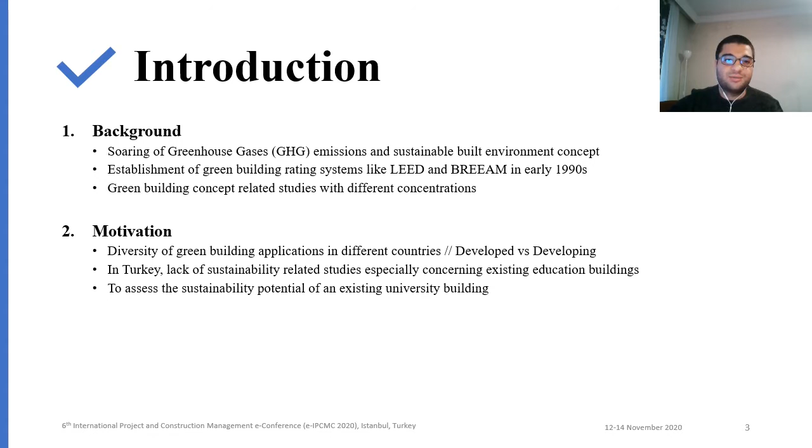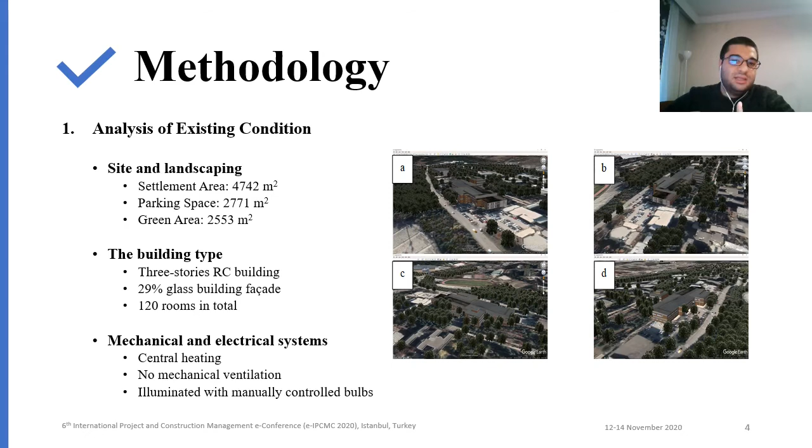In terms of mechanical and electrical systems, the building is centrally heated and doesn't have a mechanical ventilation system. And the indoor illumination is achieved with manually controlled bulbs.

Secondly, aiming to assess the sustainability potential of the existing building and to develop an understanding of whether LEED retrofitting is cost efficient or not, data is collected through, first, on-site observation and walkthroughs. Second, interviews with administrative staff. Third, document analysis. And fourth, market price analysis.

Since the building is relatively old, the exact quantitative data was missing at some points. Therefore, a couple of realistic assumptions are made in the given 5 categories: general, location and transportation, water efficiency, energy and atmosphere, and indoor environmental quality. The further details of these assumptions can be found in the manuscript. But let me give some examples on this.

It's assumed that the vehicle owners don't use alternative transportation modes. Moreover, the occupants' daily building usage durations are assumed to vary according to their social roles. What I mean is that the daily building usage durations change if an occupant is a student or an employee.

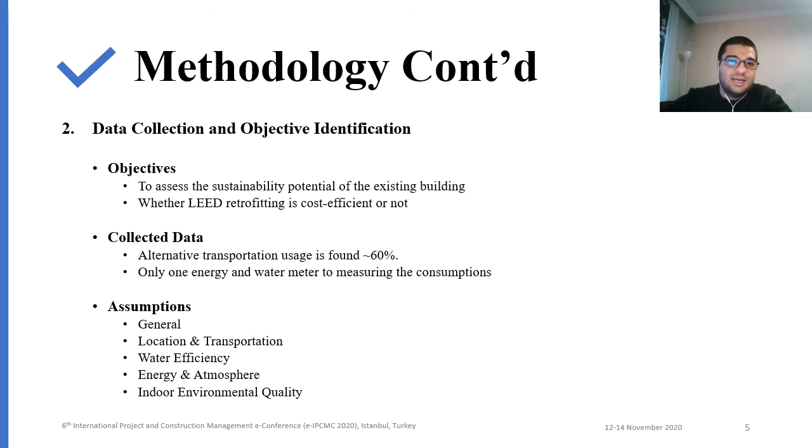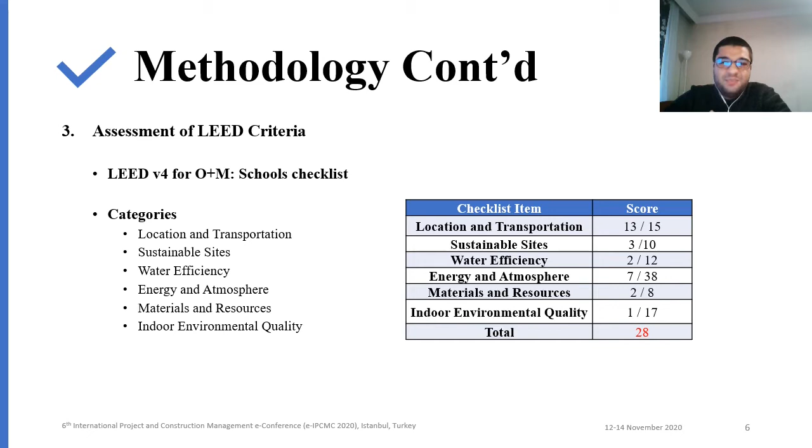As a result, 28 points are acquired for the existing condition from all the categories. Hence, at least 12 more points are needed, since the minimum required point to get LEED certified is 40. Accordingly, potential improvements are studied. In the LEED checklist, some categories have preconditions, namely prerequisites. They are needed to be eligible to be evaluated for the certification process. Therefore, these improvements are primarily selected.

For location and transportation, to increase the alternative transportation usage rate, preferential parking spaces are planned to be labeled. For water efficiency, the following improvements are suggested. They have 32% water use reduction potential in total. The individual contributions are also shown in the parentheses in the text.

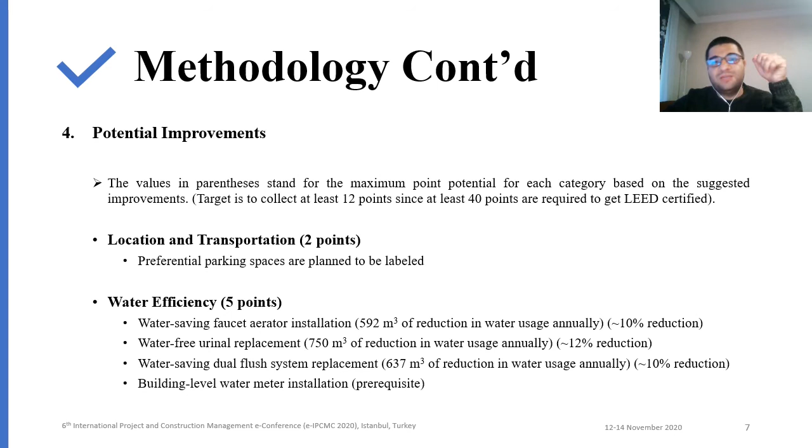In terms of energy and atmosphere, the proposed energy-saving system replacements provide around 33% of reduction in the energy use. And for the indoor environmental quality, air quality alarm installation, adjustable electrical switch replacement, and daylight measurement device installation are considered.

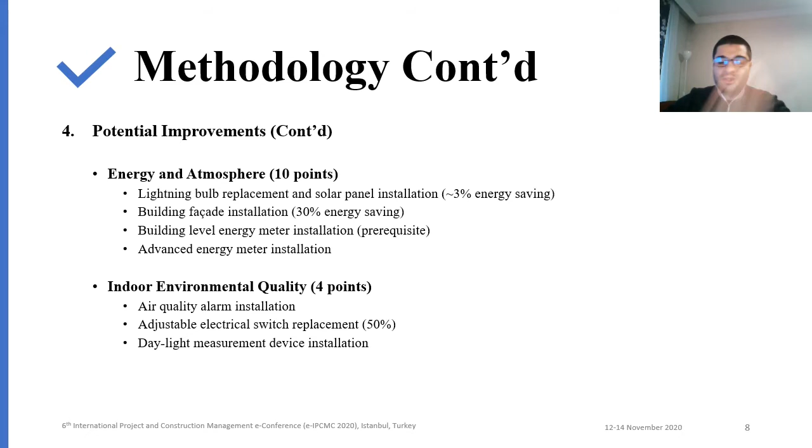Before starting this part, I would like to mention that even if we aim to measure the sustainability potential, we had to use the monetary equivalent of the improvements as a measurement tool in our analysis. This is because our world is mainly dominated by money.

Back to the topic, the proposed improvements are evaluated by performing two different analyses. First one is the cost benefit, and the second one is the cost efficiency. The main difference between these methods is that cost-benefit analysis is profitable in the long run, while cost efficiency offers the cheapest solutions based on the initial costs.

The calculations are conducted based on annual equivalent cost of the improvements. It's because these improvements have unequal service lives. Furthermore, first, the estimated initial cost, second, the expected incomes, third, the maintenance cost, and fourth, 10% of constant interest rate are considered throughout the calculations.

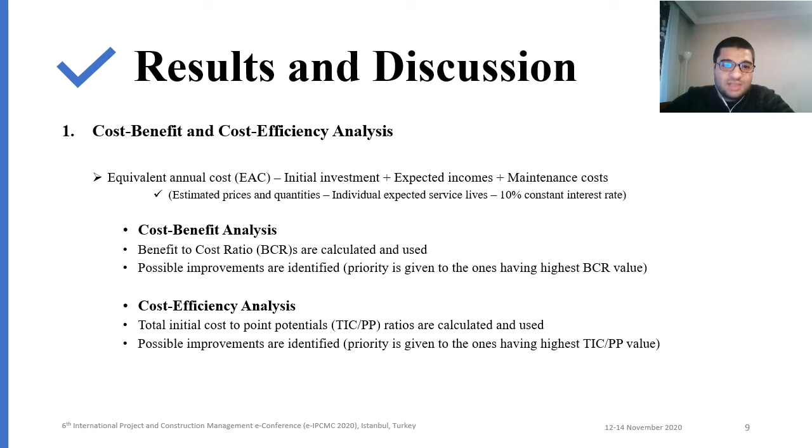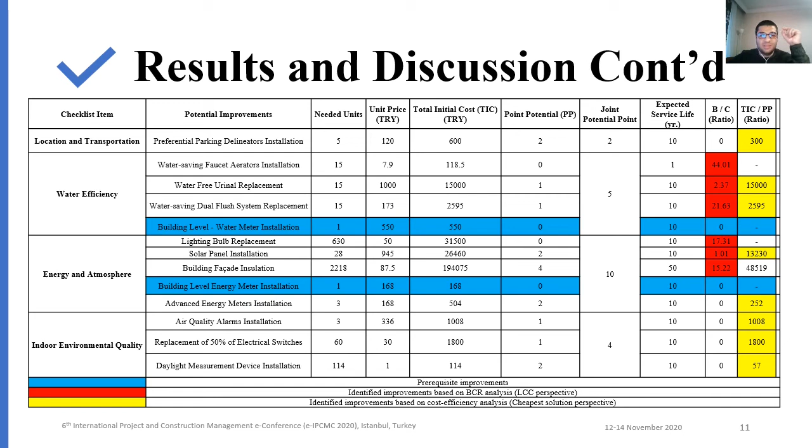In this table, I want to mention a point. As you can realize, some of the benefit to cost ratios are zero. This is because these improvements don't have an income potential, which is considered as the benefits in the study. Here is a further comparison of the findings of two methods. In the comparison, we realize that social benefits of the improvements also need to be considered. However, their monetary value representation was not possible in these analyses.

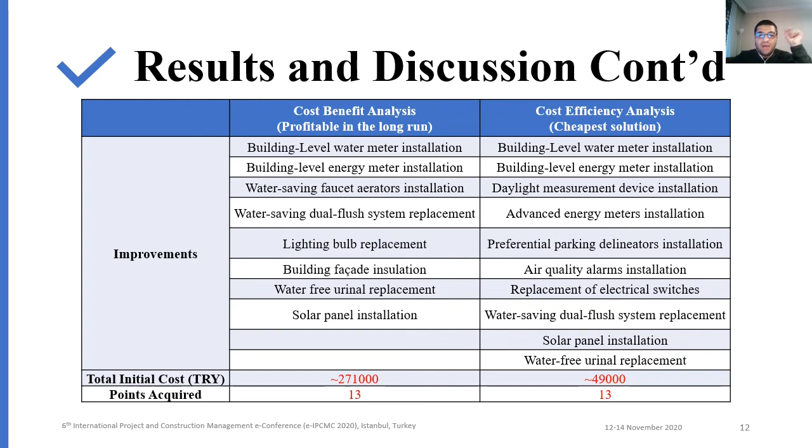Ultimately, as it can be followed, the total initial costs differ for two methods, while the point potentials are the same. This reveals that improvements in cost-benefit analysis are profitable in the long run due to the expected incomes, while the rest offers the cheapest solutions to get LEED certified only.

In a nutshell, in this study, the sustainability potential of METU Civil Engineering Department's main building for LEED retrofitting is assessed. The aim was to collect the minimum required score to get LEED certified and to raise awareness for educational facilities. To do so, first, the existing condition of the building is analyzed. And second, the potential improvements are identified. Following, these improvements are assessed from both cost-benefit or life cycle cost and cost efficiency perspectives.

The results of the cost-benefit analysis show that the priority should be given to water and energy-related improvements. On the other hand, location, transportation, and indoor environmental quality-related ones come to the fore based on the cost efficiency analysis. Considering the use purpose of the building, as a limitation in this study, only minor retrofits are considered to not take the building out of service. So, major ones may have greater potentials.

As a future work, we suggest that social and environmental aspects of the retrofitting should also be analyzed besides the analysis in this study. All in all, the findings of this study reveal that the initial cost of sustainable LEED retrofitting in educational buildings can easily be compensated thanks to the reductions in the resource usage.